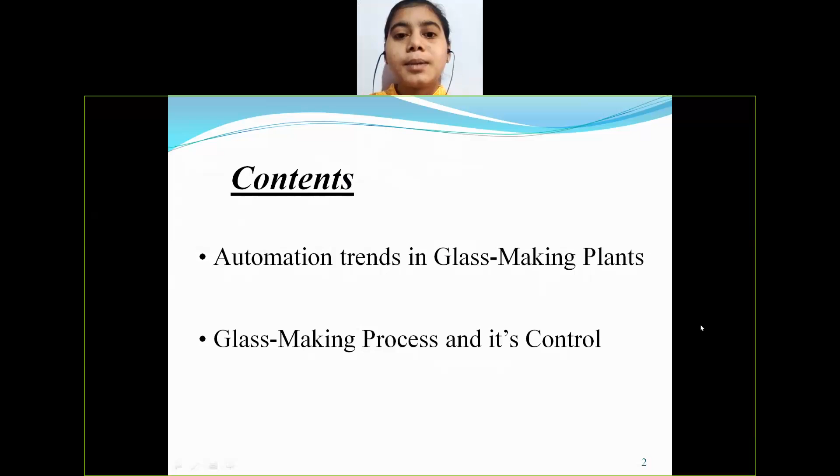The contents are: automation trends in glass making plants, and glass making process and its control. Automation trends in glass making plants.

Due to many developments made in glass making processes, demand for more sophisticated instrumentation and control for improving product quality, productivity, and saving of energy and labor has become greater. The application of automation in manufacturing process is to reduce cost, improve quality, increase productivity, and reduce dependency on manual control. The reduction in labor force has become the smallest achievement in automation.

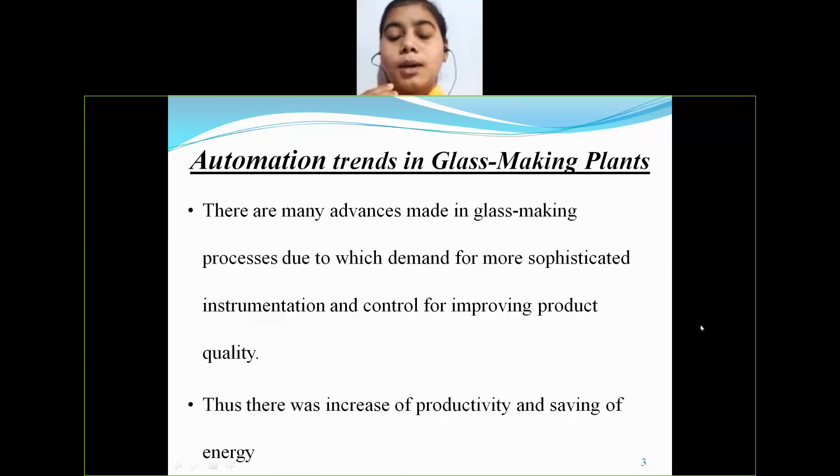It has made major savings, but not by removing labor, rather by improving quality, productivity, and efficiency in ways not achieved by men in the processes.

Glass making involves a variety of distinct processes like preparation of mixture of raw materials, followed by melting and molding. For example, sequence control is used for preparation of mixture of raw materials, and feedback control is used for the melting process.

In the material preparation, raw materials fed in bunkers are weighed according to a preset recipe, mixed in a blender, and charged into the service hopper.

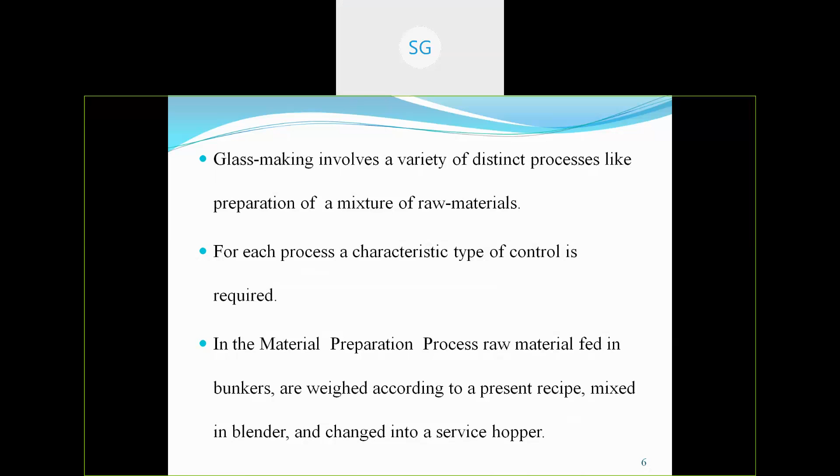Hello, good evening, everyone. My part of discussion is material preparation in glass making plant. Look at the diagram: there is a cullet, service hopper, and a furnace. All these things are used in the preparation of glass.

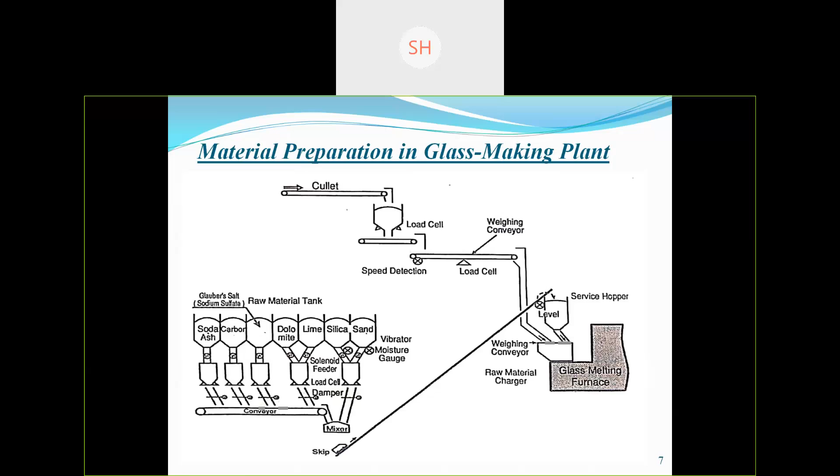Initially, glass is a transparent or translucent material, and in the process of making glass, the materials used are lime, soda ash, limestone,

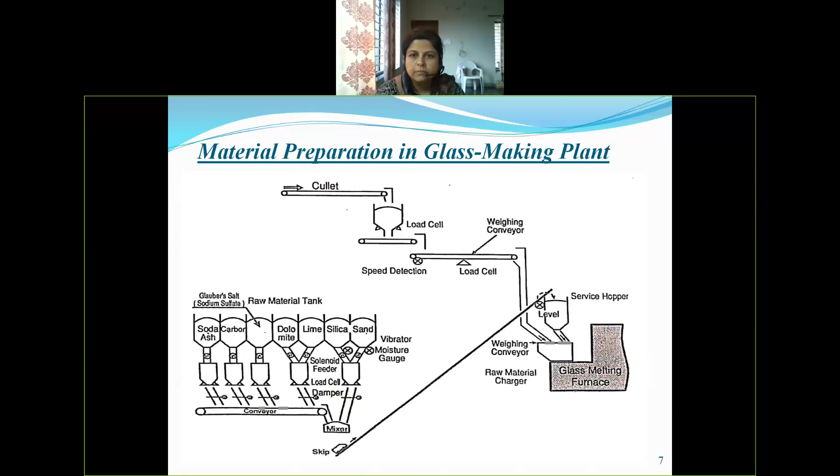and sand, silica. These three materials are mixed and made into a powder, and these materials are heated with the cullet, which is pieces of glass

used to heat with the powder mixture because it reduces the temperature of the raw material. This mixture is heated to about 1000 degrees Celsius, and then it is made to cool. It is cooled for a large amount of time because it can't be cooled suddenly. The next process is molding of the glass.

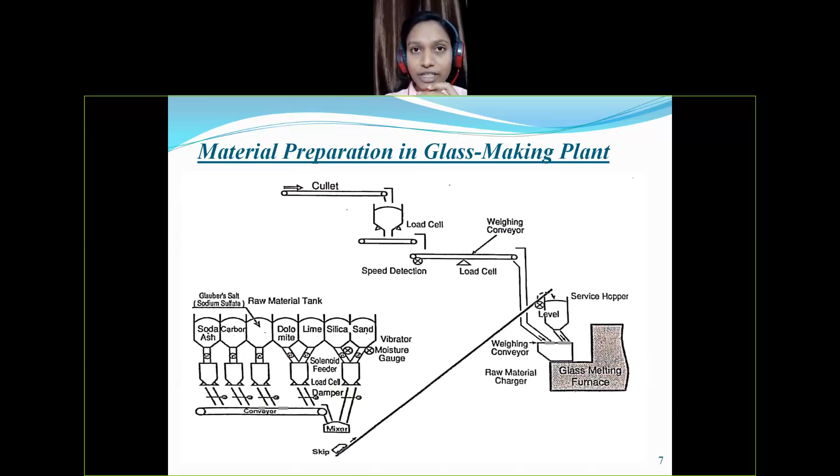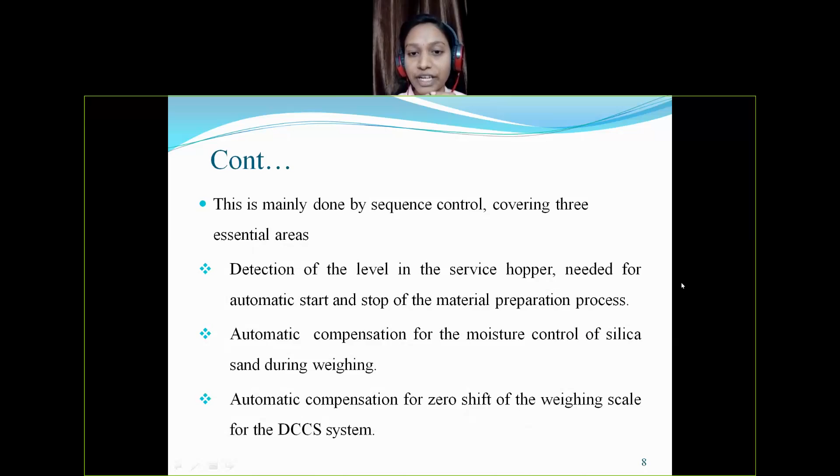The next part is automatic compensation for moisture control of silica sand during weighing. The moisture content of the sand has been observed because it might lead to disturbance in the preparation of the glass. Also, automatic compensation of zero shift of the weighing scale for a DCCS system has been observed so it won't create any problem in the glass making.

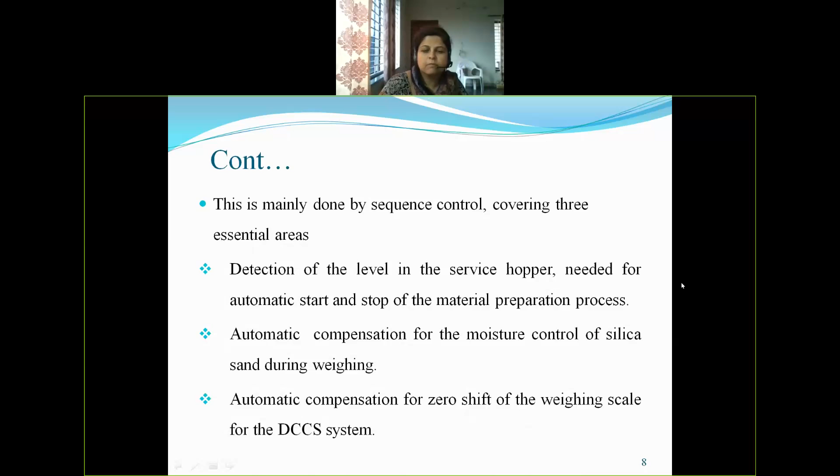Glass melting furnace is used to melt prepared material to obtain glass. These mixtures are melted to obtain glass. The primary control point for this process is the furnace temperature, which is to be maintained, and it is difficult to control.

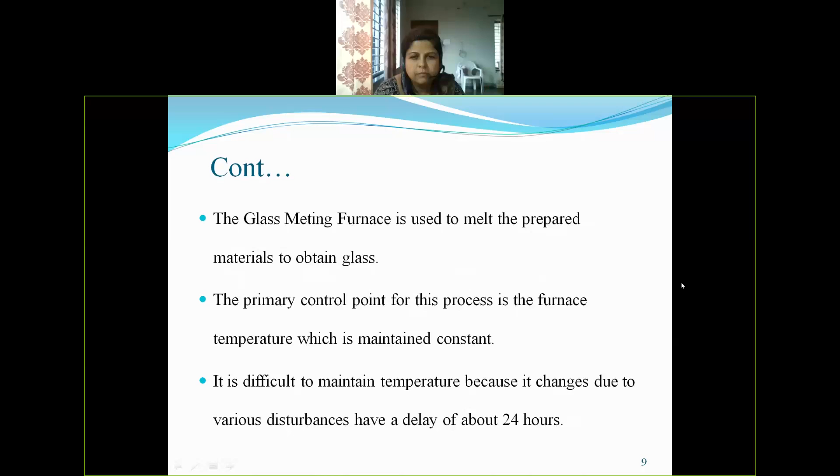It may include the temperature of a raw material charge or a service hopper charge. It is difficult to maintain the temperature because it changes due to various disturbances over 24 hours.

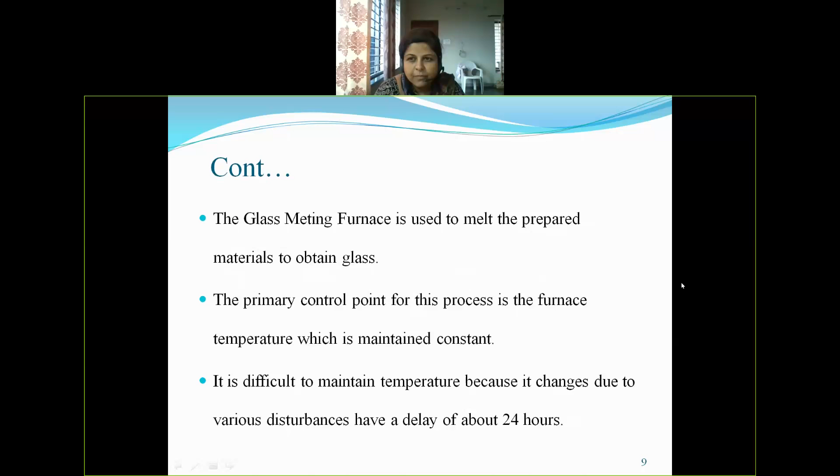The next slide is a video to be played. It concentrates on automation in glass making plants, where you can clearly see the glass making process in the industry. Next slide ma'am is a video, I think it will play. It may not play because you need to send the video file also, or since it's a YouTube link it may. Yes ma'am, it's YouTube, let me check.

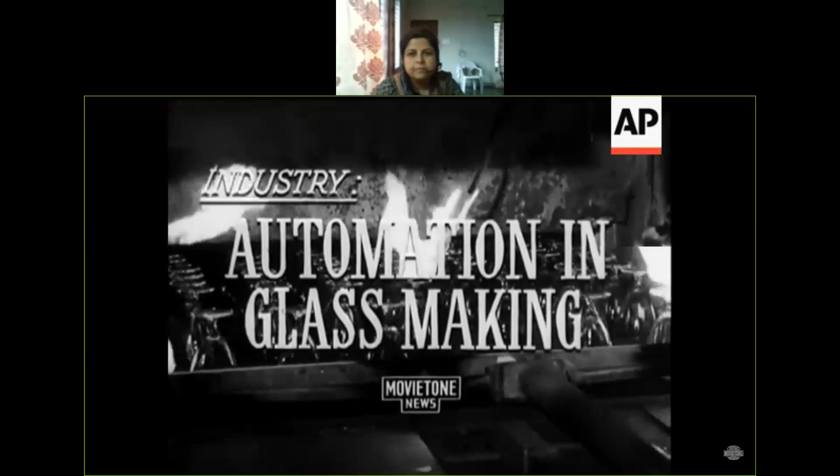No, it's not a merry-go-round in that hot place down below. But like most glassware manufacturing plants, this one in Sydney has plenty of heat with lots of bang and patter.

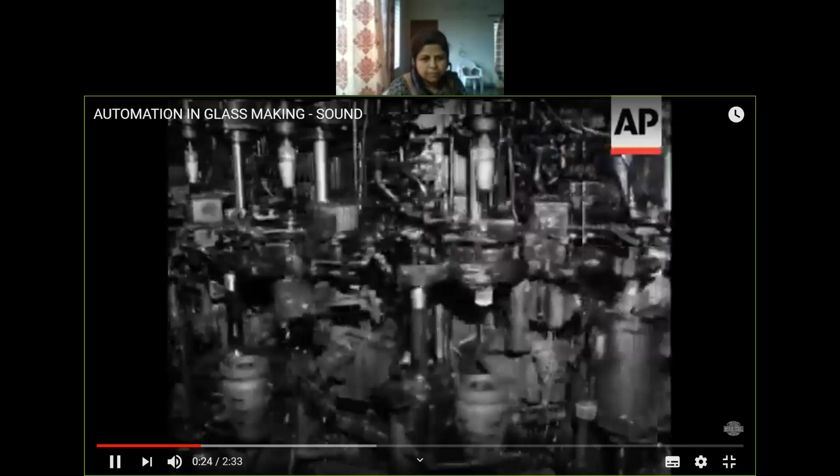Sound is not hearing, ma'am. Is it so for all?

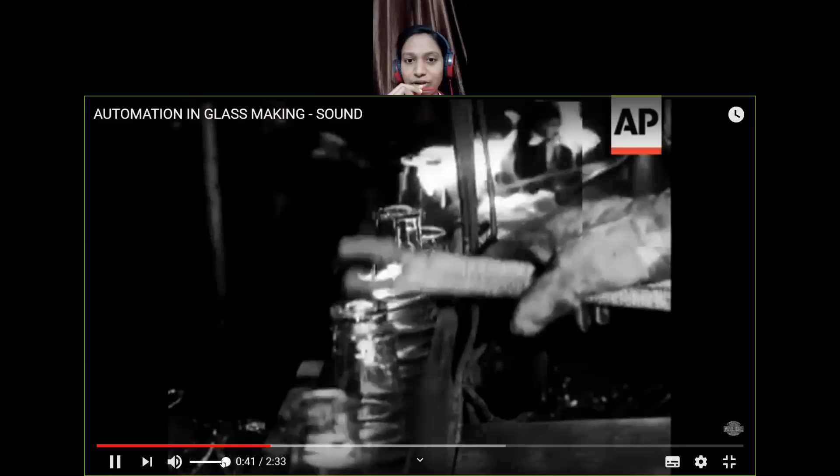Transferred to the press where stems are to be fitted.

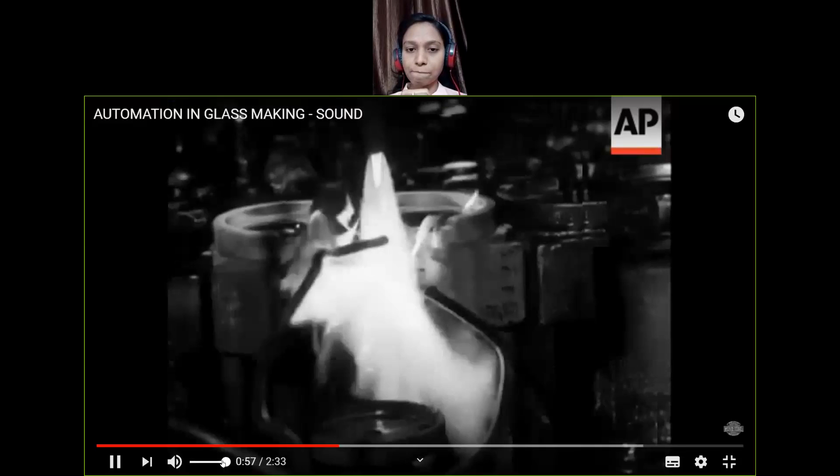First appear as small globs of molten glass from melting furnaces heated to 2600 degrees. The heat treatment continues as the sections are joined. There's yet another heating process if the glasses are to carry patterns or colors.

Manufacture of containers for foods is an important part of the glassware industry in Australia, following the development of self-service grocery stores. These will be 6-ounce containers for sandwich spreads.

It's one industry where quality control is a must, but there's little waste. Anything rejected goes back into the melting pot, and the process starts all over again.

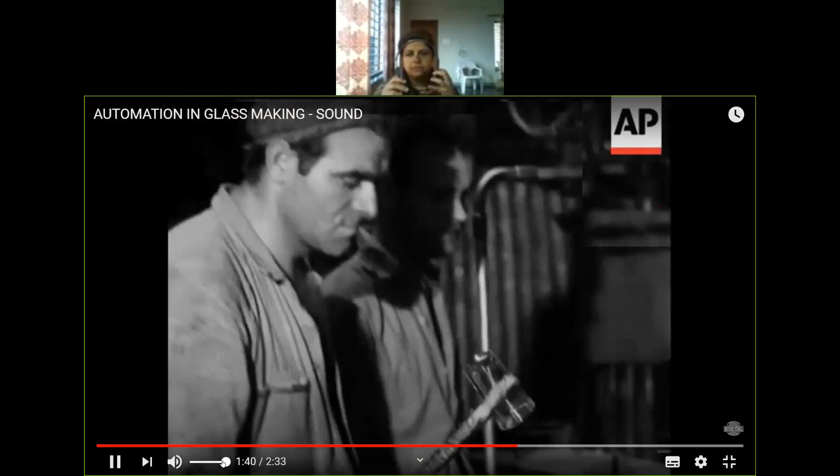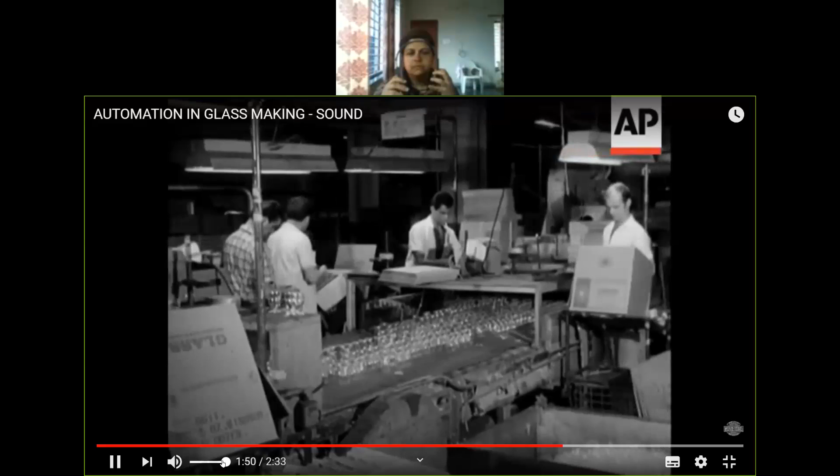Some of the glassware is exported, but most of the products will end up in Australian homes in one form or another.

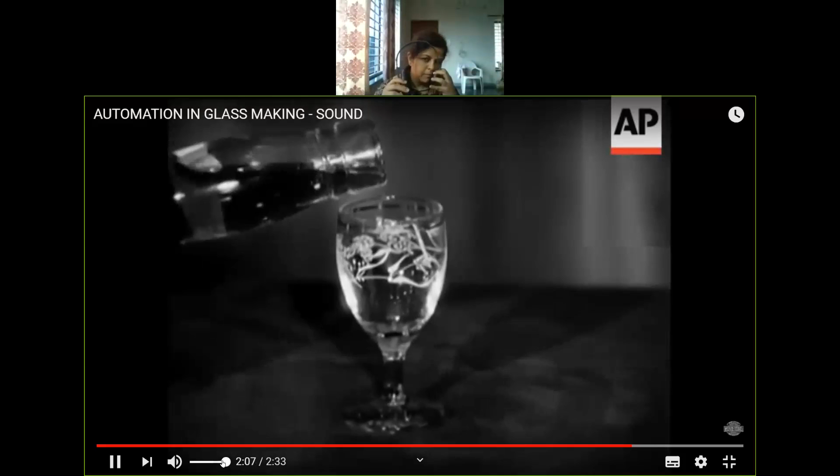All sizes, all shapes, catering for all tastes and all thirsts, from a gallon to a gulp. And for a real handful of drinking, try this one.

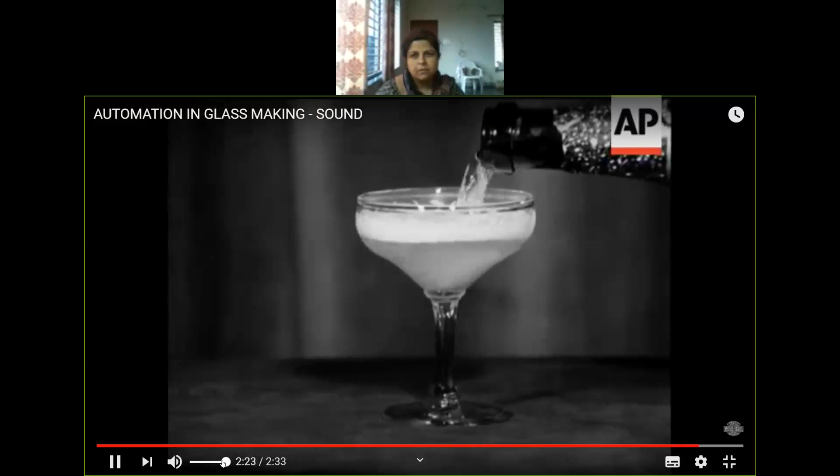But from the Champagne Charlie to the best in beer drinkers, the local glassware industry is catering for a multitude of thirsty tastes. Now out of the time tunnel, fashions for the...

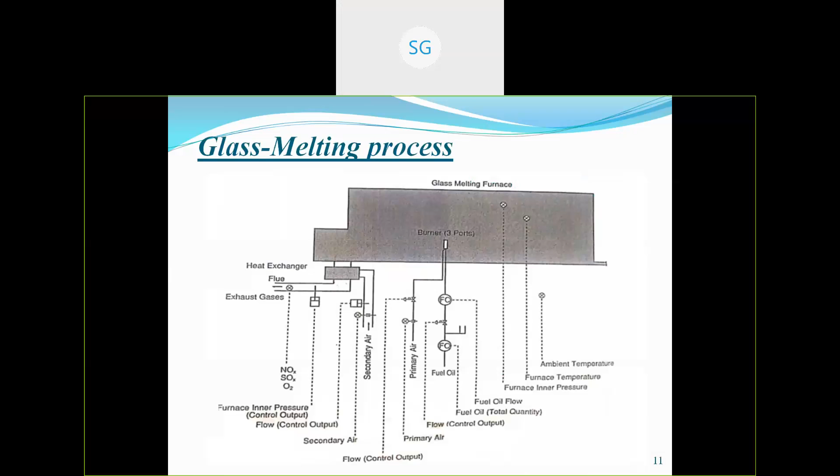Okay, ma'am. Is it over? Yes ma'am, Aishwarya has to continue. Yes ma'am, Aishwarya you can continue by turning on your video. Okay. Yeah.

Good evening. This is the block diagram of the glass melting. In this, the fuel is diverted to three systems and it burns on the three.

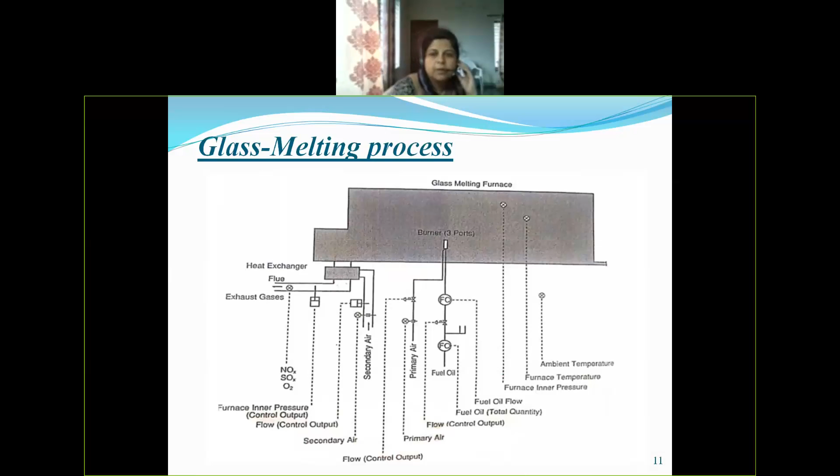Next slide. Next slide, okay. Previous one. Fuel, no ma'am. Previous one, ma'am. Is it okay?

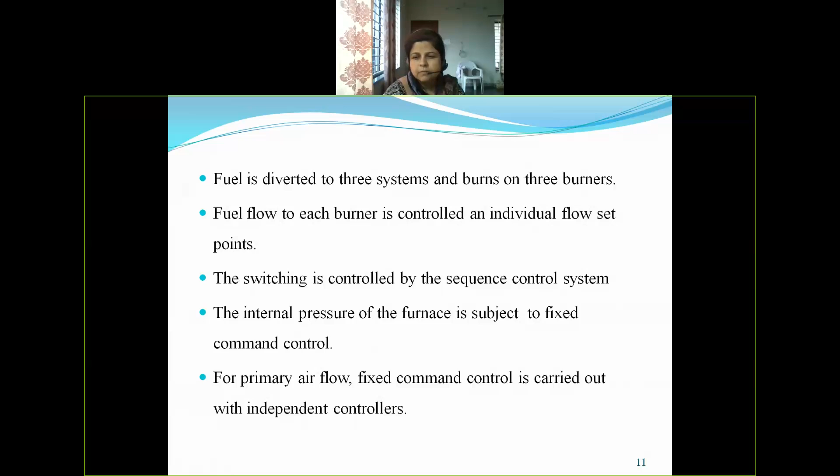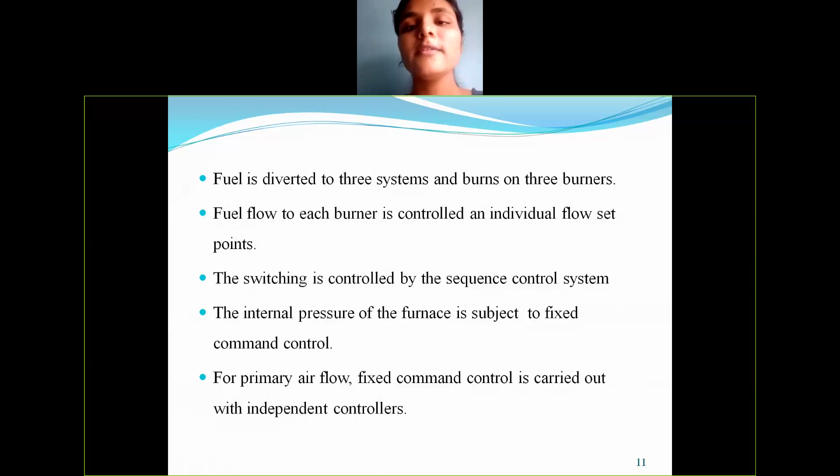Okay, let's go to the next slide. Thank you. Okay.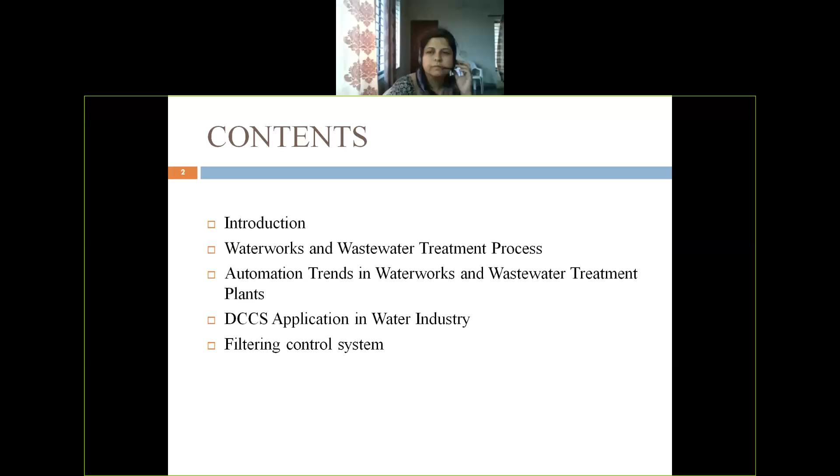As you all know, wastewater from factories and houses is dumped into rivers and lakes, which is unhealthy for the environment. So managing this dumped water is a difficult and substantial task for municipality workers.

Wastewater treatment can be done by two processes: water softening and purification. Water softening is removing or reducing the hardness of the water, meaning the minerals which are of no use are removed. That is called softening.

Purification is the removal of organic matter and microorganisms. The unnecessary microorganisms and organic matter which are unhealthy are removed, and that process is called purification.

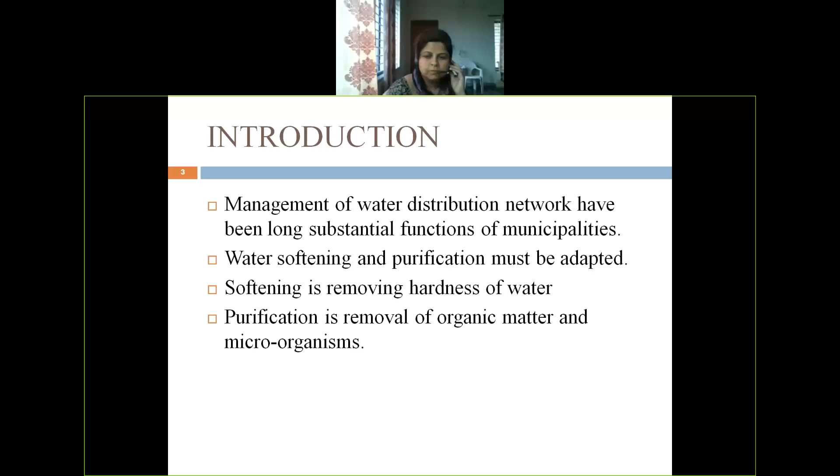This is the municipal water work flow chart. The raw water, which has a hardness of 376 ppm, is aerated through the aerator, and there is also a raw water control so the amount of water passed through the aerator can be controlled. Then it is partly softened.

Chlorine is added to destroy the pathogenic microorganisms, and activated carbons are added to remove the odors and improve the flavor of the water.

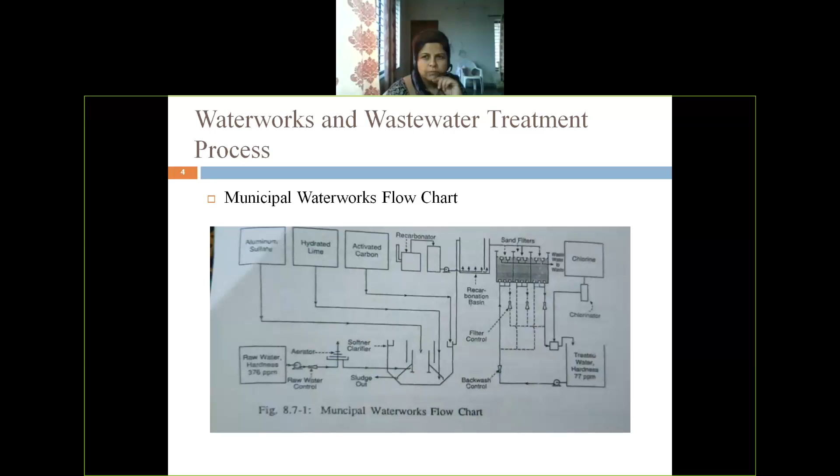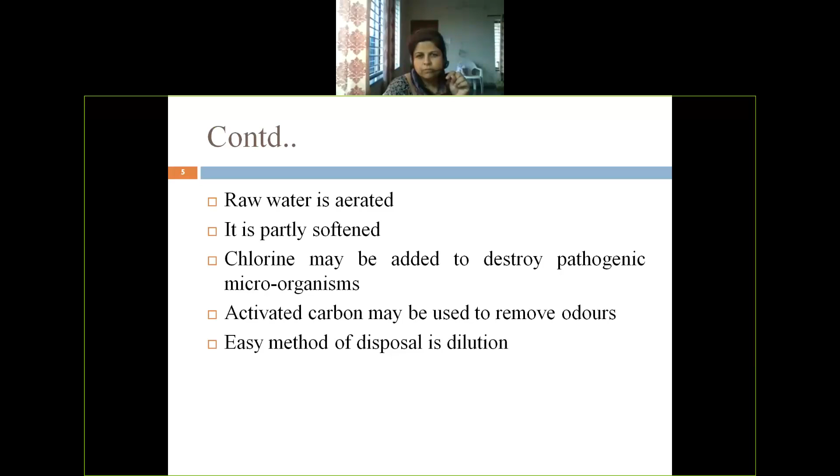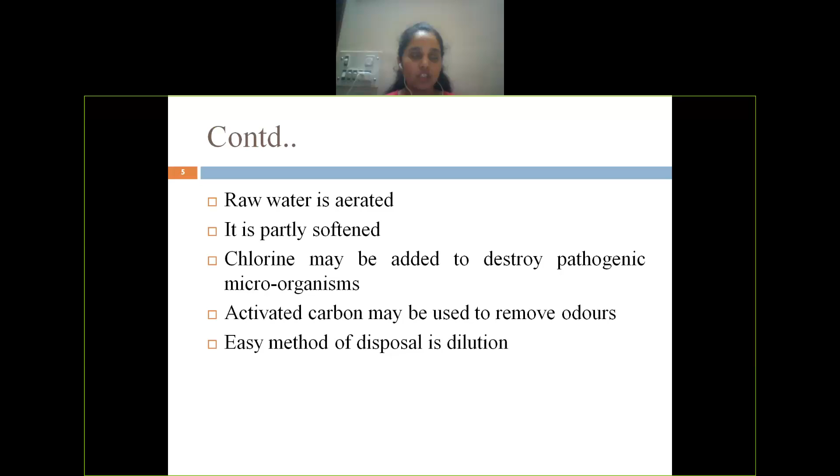This is what I've explained: the raw water is aerated from lakes or ponds and partially softened. Chlorine can be added to destroy pathogenic microorganisms, and there is an easy method of disposal, that is dilution. Dumping in the river or lake is no longer tolerated, as it is injurious and may affect the environment.

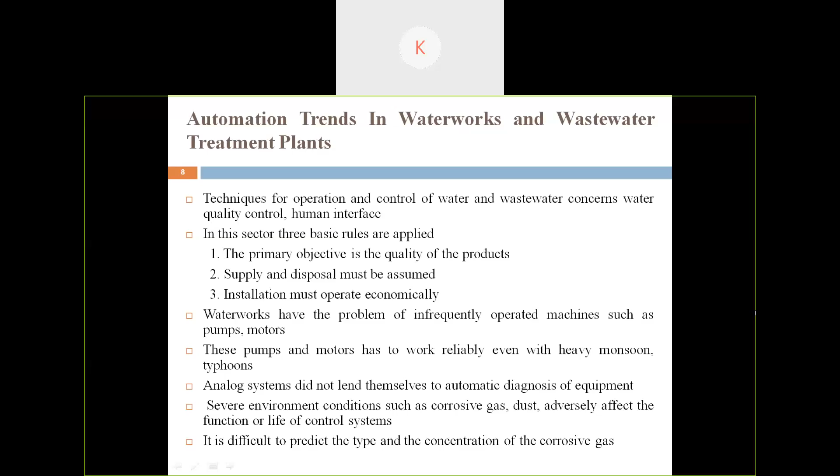There are severe problems in environmental conditions such as corrosive gas, dust, and moisture, which affect the life of the control system. It is very difficult to predict the type and concentration of corrosive gas generated in wastewater treatment because it depends on the season, ambient temperature, quantity and quality, etc.

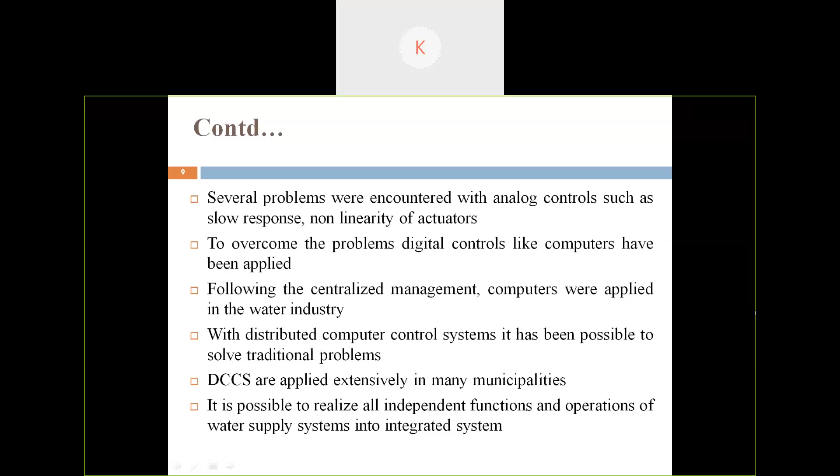the distributed computer control system has made it possible to solve these problems. Hence, this has been applied extensively in many municipalities.

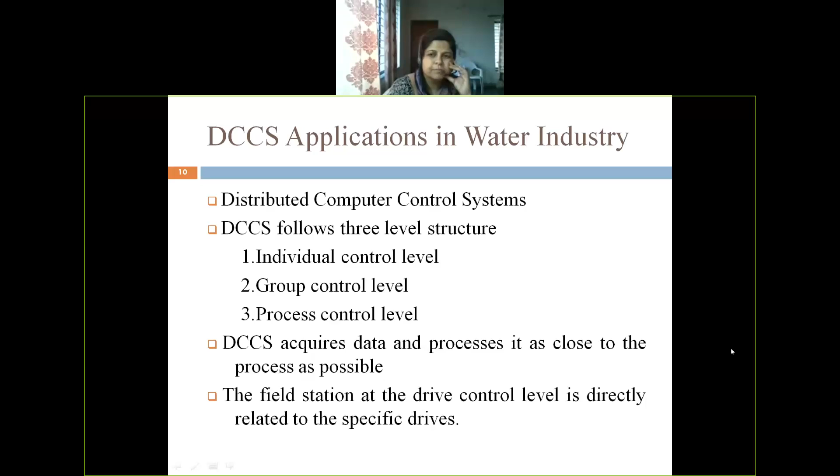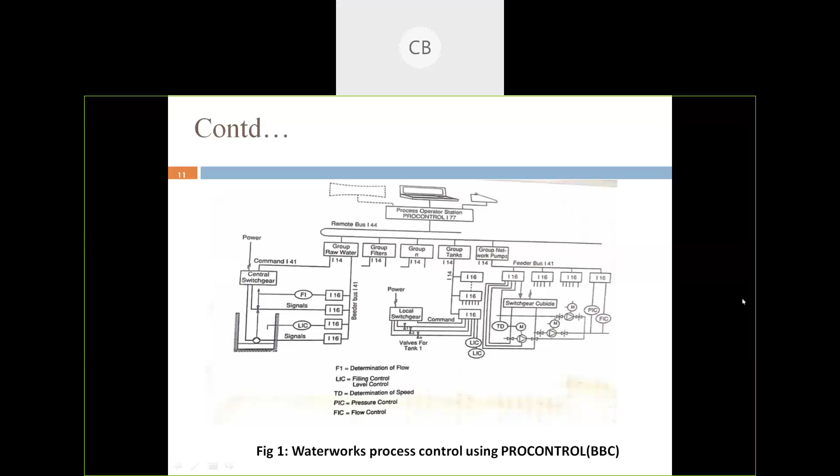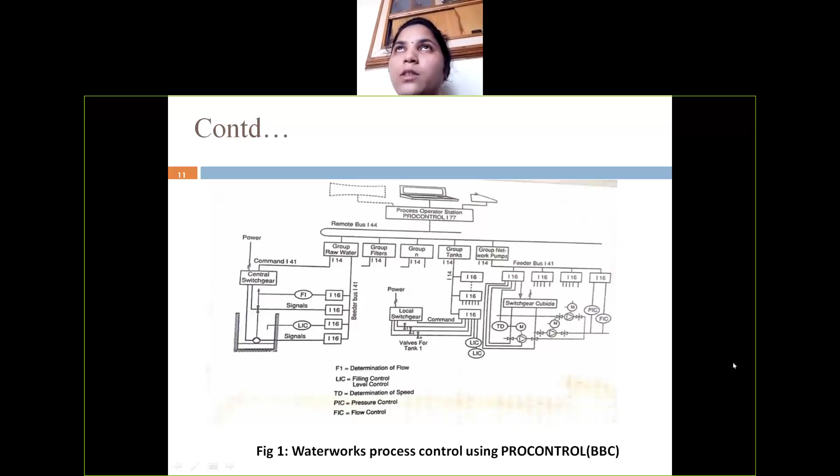Next slide. The waterworks process control uses a PROCONTROL diagram. In this diagram, the feeder bus is used to interconnect the drive control with the process control and group control levels. The feeder bus transmits the state signals and sensor signals.

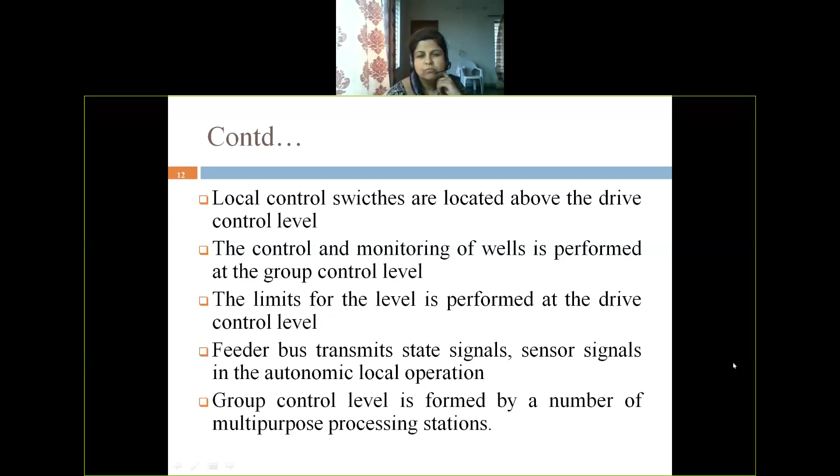The group control level is formed by a number of multipurpose processing stations. One station, for instance, is provided for controlling the filter basins. Thank you, ma'am.

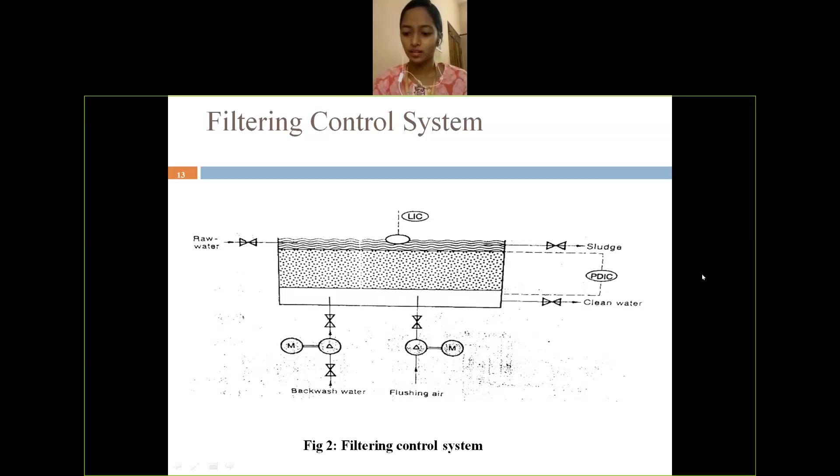LIC is a filling level control; it shows the water level above the filter bed, and PDIC monitors the amount of pollution. If the pollution level crosses the maximum pollution value, then the multi-purpose processing station has to switch the system over to flushing. This multi-purpose processing station comes under the group control level.

As described in the previous slides, in waterworks the multi-purpose processing station comes under the group level, whereas there are three levels: individual level, which is the bottommost level, then group control level, and then the process control level.

Now the clean water and raw water valves should be open, and the sludge valve should be closed. For flushing, raw water and clean water should be closed, and the sludge valve should be open, and compressed air should be allowed in so that the filter bed is loosened due to the compressed air. After some time, backwash water also starts the flushing process.

A servicing unit can be connected to the multi-purpose processing station, which acts as a man-machine communication interface.

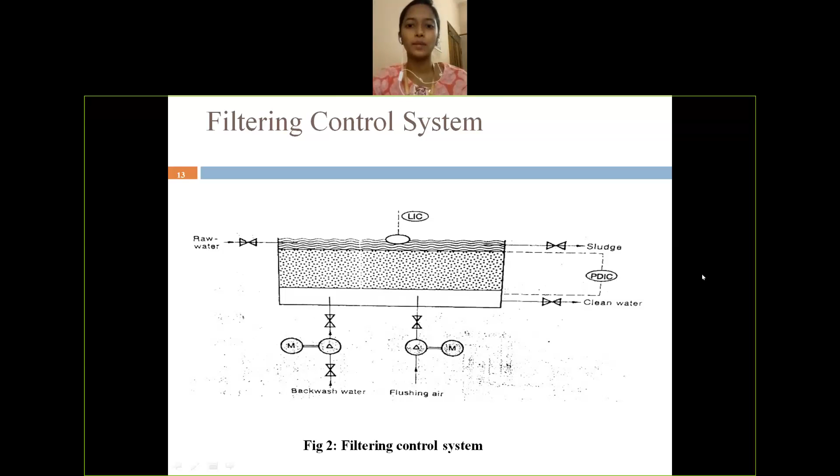The last one is the remote bus, which consists of a single twin axial cable. This works over the entire water networks. To make this remote bus redundant, we need a second cable diverted to another site, because if any cable is spoiled, the whole network won't be disconnected.

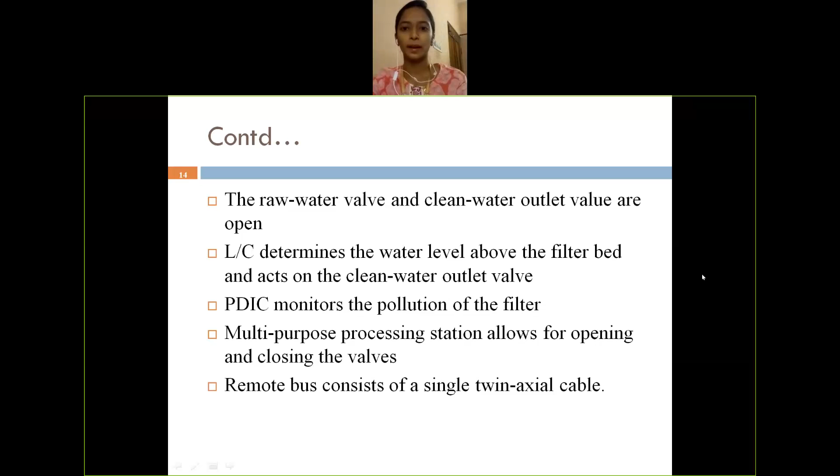In the process control level, that is the top level, man machine communication is used. The elements of this can be a display unit, a printer, or a lamp, acting as an output display unit. Higher order tasks have complex calculations such as requirement forecast calculations, energy management, and correlation calculations. This comes under process control level.

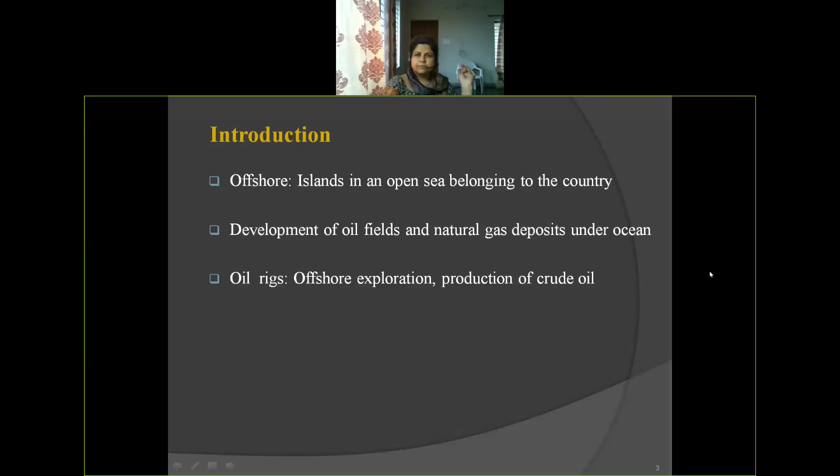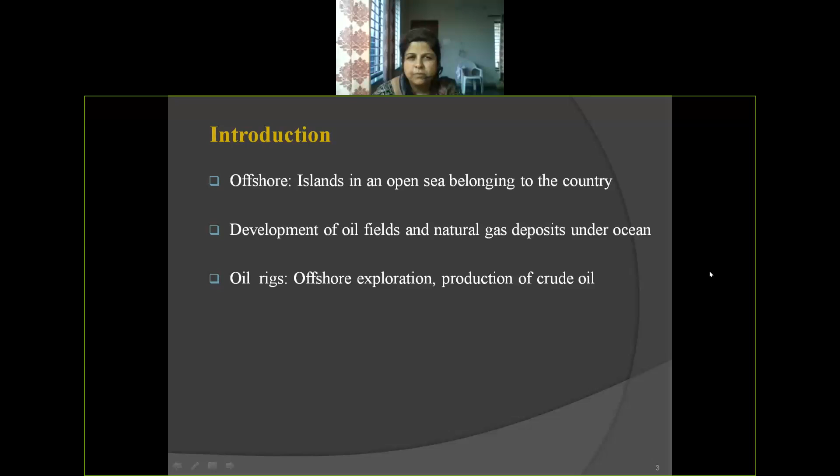Thus, the oil industry's demand for energy commodity. The downstream oil refers to the refining of crude oil and the selling of natural gas and other products derived from crude oil, such as liquid petroleum gas (LPG), gasoline, petrol, jet fuel, and diesel oil. These are consumed through thousands of products such as petrol, diesel, natural propane, lubricants, fertilizers, as well as pharmaceuticals, etc.

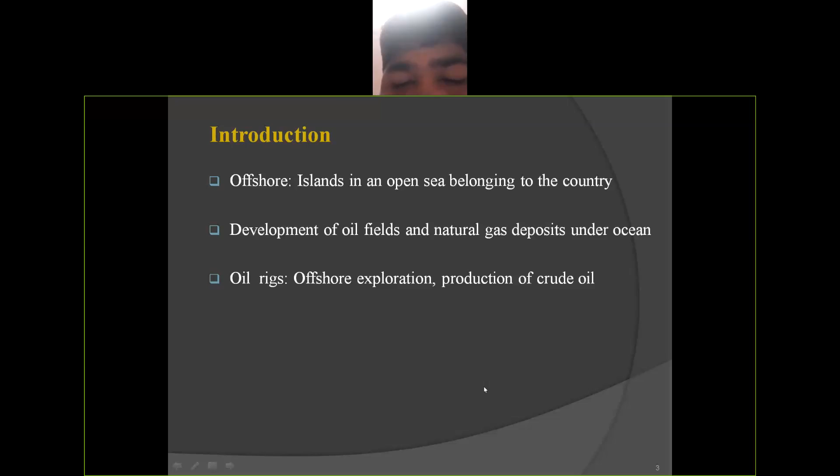This is used in the control room of the plant. Additional operator workstations are planned and display the system configuration for availability purposes as well as transparency. Two subsidiary stations are modules with the possibility to process the plant, allowing the operator to survey the status of the whole plant, quickly obtain the expected data, and give priority to the current plant system, thus improving efficiency and limiting the control functions carried out by the system.

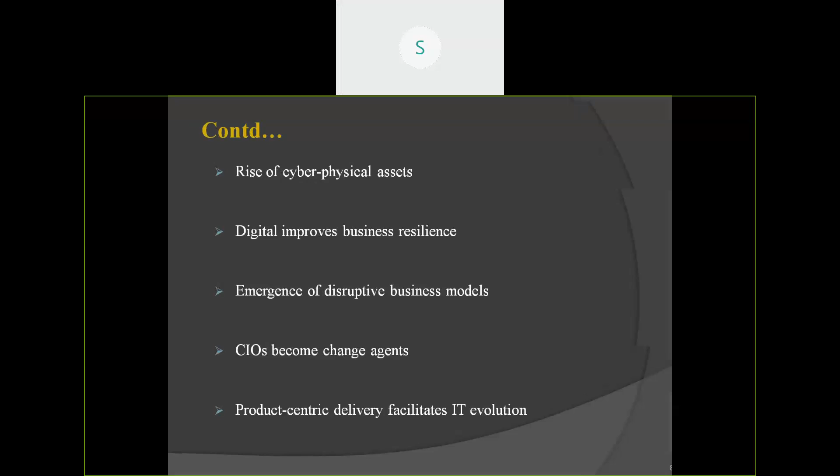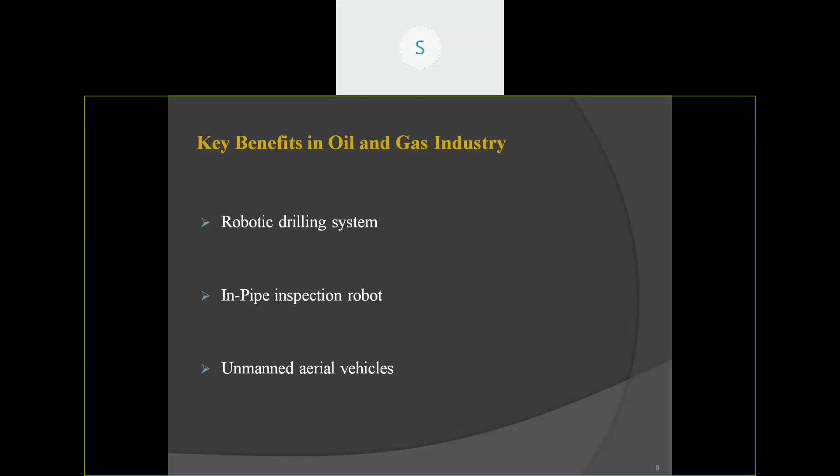Next is unmanned aerial vehicles. Nowadays drones are used even in marriages, and the same for the oil and gas facility. They are used for inspection of tanks, pipes, and refineries. They build control techniques, inertial navigation, tracking control, and data fusion. These make it effective for the exploration of oil and gas reservoirs in extreme environments where it is hazardous for human beings.

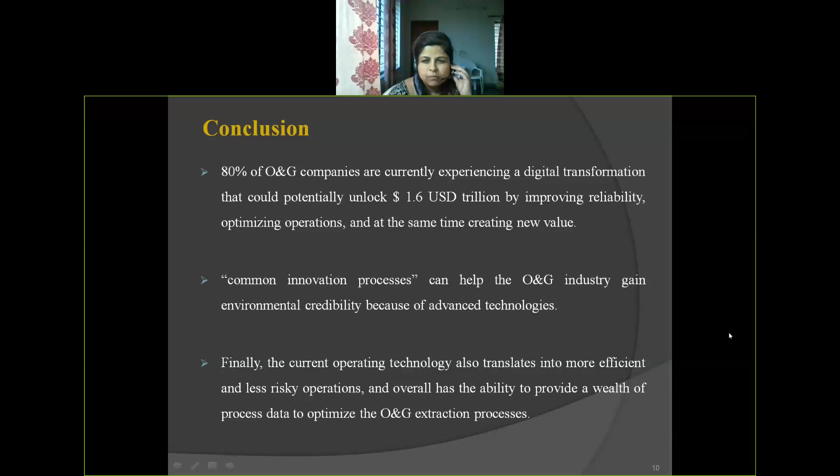We conclude that oil and gas refinery work with automation, with evolution, may have some difficulties to adopt, but we can adopt it because it cuts down human risk factors. With common innovation processes, refinery automation techniques will be helpful, there will be reduced commissioning time, and operating cost will also be less, with environmental and health safety also maintained. We call it EHS.